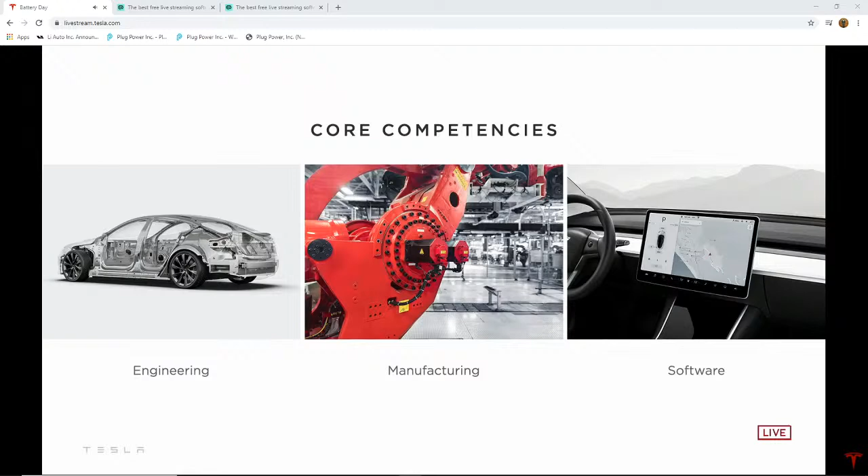Tesla core competencies: we've got engineering, obviously, but also manufacturing. I think manufacturing is underappreciated in general. And the difficulty of designing the machine that makes the machine is vastly harder than the machine itself. So making a Model 3 or Model Y or Cybertruck prototype is really quite trivial compared to designing the factory that makes it. Especially if it's new technology and you want to use new manufacturing methods, it's at least 10 to 100 times harder to do the factory than the prototype.

And that's why you see a lot of companies out there, or startups, they'll bring out a prototype, but they just can't get it over the hump for manufacturing, because manufacturing of new technology especially is the hardest thing by far. Basically the prototype is at best 10% of the difficulty and probably closer to 1%.

And then software. Tesla is both a hardware and a software company. So a huge percentage of our engineers are actually software engineers, and you can think of our car as kind of like a laptop on wheels. So software is incredibly important, not just in the car, but also in the factory, so the factory software is extremely important. And then software in general. These are the three critical areas that are needed to make for an awesome company.

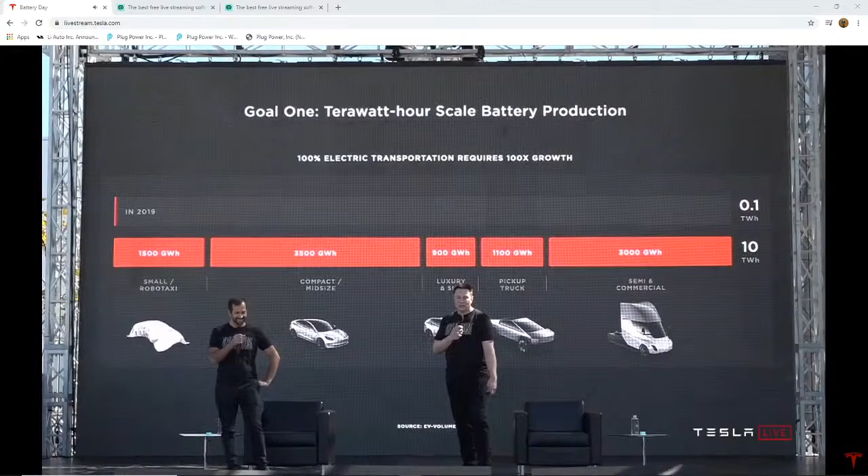Yeah, so. And then on the grid side, we have a similar mountain to climb, 1,600 times growth from today's grid batteries to go 100% renewable on the grid and to take all of the existing heating fossil fuel uses in homes and businesses 100% electric. Yeah, and this number, I think, might grow even more as the world economy matures and as countries with high populations industrialize. But let's say it's roughly 20 to 25 terawatt hours per year, sustained for 15 to 25 years, to transition the world to renewable. This is a lot. Yeah.

So today's batteries cannot scale fast enough. They're just too small. For Giga Nevada, 150 gigawatt hours per year is probably what we expect to make out of there. But this is really pretty small in the grand scheme of things. That's only 0.15 terawatt hours.

And it costs too much. So we would need 135 fully built out Nevada gigafactories to achieve 20 terawatt hours a year. It's not scalable enough of a solution. We need a dramatic rethink of the cell manufacturing system to scale as fast as we can and should.

Yeah, and I think we should view this as more than just a question of money. Money is sort of like an ethereal thing, but it's really the amount of effort. You have a certain amount of effort, in terms of people and machines, and depending on how efficient that effort is, for a given amount of effort, you want the most amount of batteries.

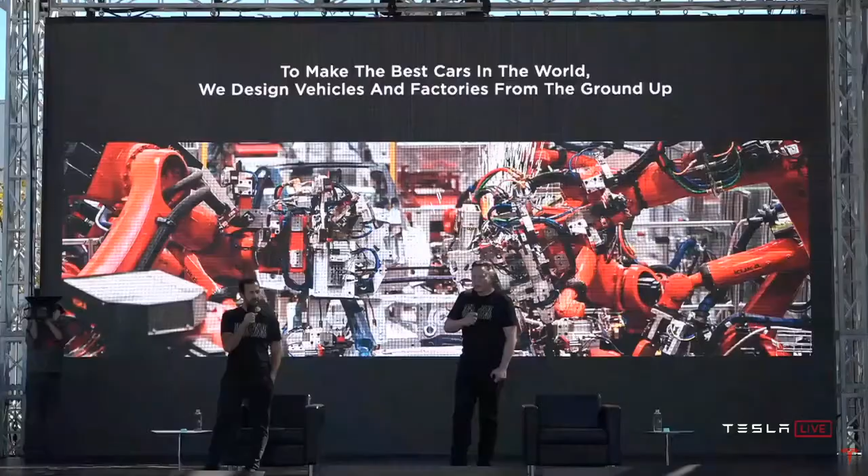And EV market share is growing, but EVs still aren't accessible to all. And you can see, as Drew was saying, it's starting to flatten out a little bit because the rate of improvement of the affordability of cars is just not fast enough. So that's why we got Battery Day. To make the best cars in the world, we design vehicles and factories from the ground up. And now we do this for batteries as well.

It's weird, the slides don't show up quite right. What shows up on the screen is not quite what shows up there. Oh, okay. It's different. Yeah, I think it's because that's... No, that one's supposed to be current.

Anyway, so let's get started. We have a plan to halve the cost per kilowatt hour. And it's not a plan that rests on a single innovation, some research project that'll never see the light of day. It's a plan that has taken creative engineering and industrialization across every facet of what makes a cell into a battery pack, from raw material to the finished thing.

And we're going to go through that plan with you today, step by step, and build up how we get to these goals and how we accelerate this transition and make our vehicles and our grid batteries more affordable. Yeah, we basically thought through almost every element of the battery. There are a few more elements that we won't get to today, but we will get to in the future. So first, before we get too far into it, let's talk about what is in a battery cell.

We've got the cap and the can, negative and positive terminals of the cell. When you open that cell, you've got a tab connected to those terminals, what we call the jelly roll, which is the wound electrodes on the inside. You can actually see what this looks like as you unwind it. This is over 1 meter long in a typical 2170 cell. So it's quite a long winding process. And you can see the tab still there.

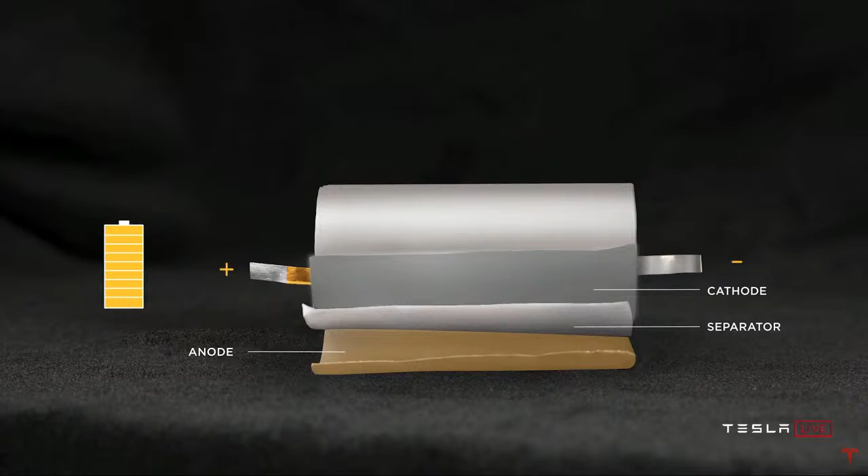To explain what's actually going on here, we've identified anode, cathode, separator, positive and negative terminal. Watch what happens as we discharge the cell: lithium moving from anode to cathode, and then the reverse. When we charge the cell, lithium moving from cathode to anode across the separator. This is the basic of what makes all lithium-ion batteries, no matter what the form factor is.

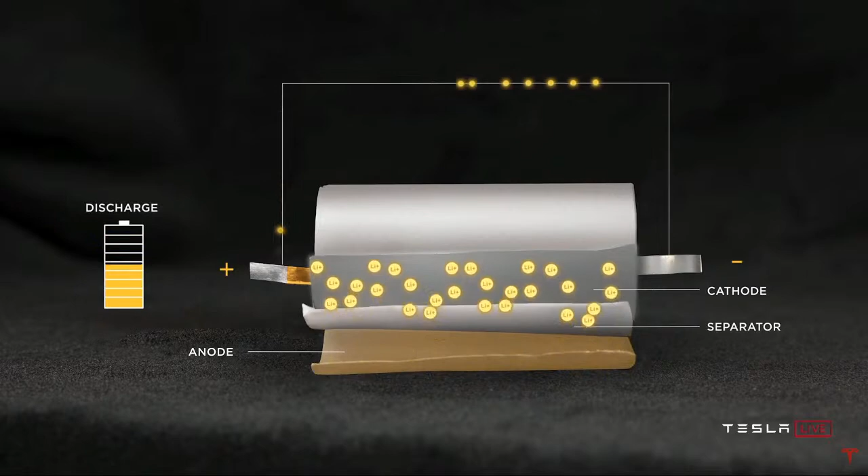And when we look at what's happened to date, at least in our products, we've moved from the 18650 form factor to the 2170 form factor through great collaboration with our partners, Panasonic, new partners like LG and CATL, and probably others in the future.

Yeah. Actually, a slight note on why one is called the 18650 versus the 2170: the first two digits refer to the diameter, and the second two digits refer to the length. So that helps explain what's up with these weird numbers. But nobody could explain to me why there was an extra zero. So I said, okay, we're deleting the zero that nobody can explain in future form factors. So that's why it's technically the 18650, bizarrely, but going forward it's the 2170 because we just got rid of the extra zero because it's pointless.

And this was an evolutionary step, going from 1865 to 2170, bringing 50% more energy into the cell. But when we look to the ideal cell design, if we were to do it ourselves, we need to go beyond what's in front of us and study the full spectrum of options. So as you can see, we swept the key figures of merit, how much we can reduce the cost, and how much vehicle range increases as we change the outer diameter of the cell. We found a sweet spot somewhere around 46 millimeters.

Yeah, and I want to stress, this is not just a concept or a rendering. We're starting to ramp up manufacturing of these cells at our pilot 10 gigawatt hour production facility just around the corner. Yeah. So, yeah. It's a video of some of what's going on in the plant.

Now, to be clear, it will take about a year to reach the 10 gigawatt hour capacity. So this is important to appreciate. Like when you build a factory, there's a certain capacity that you design to, and then it takes some period of time to actually achieve that capacity. So I would say it's probably about a year before we get to the 10 gigawatt hour annualized rate with the pilot plant. And this is just a pilot plant. The actual production plants will be more on the order of maybe 200 gigawatt hours, maybe more over time. And thank you.

But let's stack up everything we just saw at the cell level. So just the cell form factor change enables a 14% dollar per kilowatt hour reduction, just that cell form factor change. And now that you've been teased on this factory, we're going to go on and walk step by step through that factory and discuss a series of innovations there.

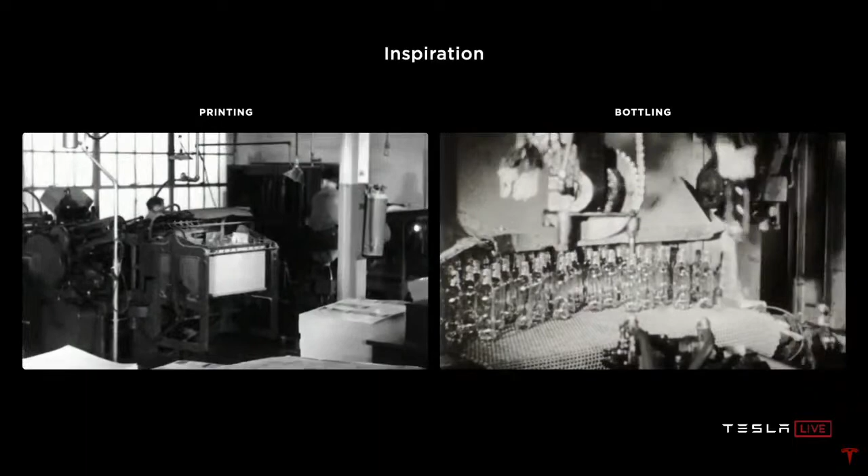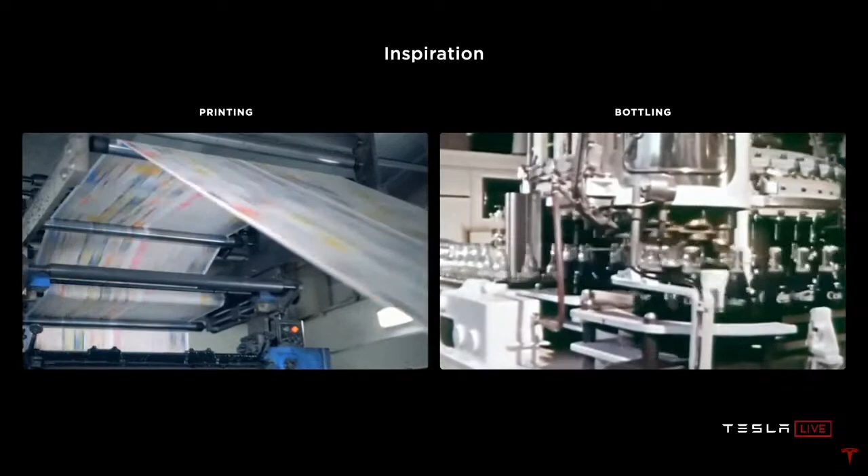When thinking about the ideal cell factory, we have inspirations behind us in the printing and bottling industry, where from humble beginnings, over a century of innovation has enabled mass scale, continuous motion, unbelievably low manufacturing cost. And when we think about the lithium-ion industry, which is really only in its 3rd decade of high-volume production, it has so far to go to achieve similar scale and simplicity. And that was the inspiration that we set out to the team as we thought about how to marry cell design and manufacturing in the best possible factory.

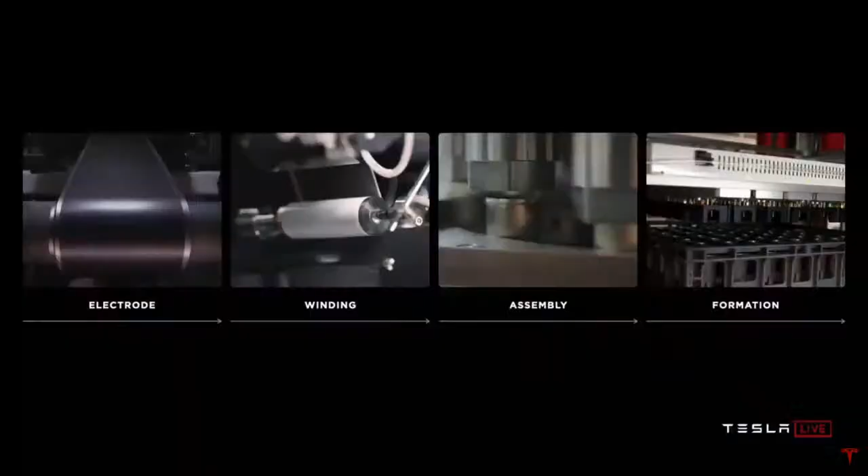And let's talk a little bit about what's in a cell factory. First, there's an electrode process where the active materials are coated into films onto foils. Then those coated foils are wound in the winding process we just talked about, where if you do have tabs, you have to start and stop a lot. Then the jelly roll is assembled into the can, sealed, filled with electrolyte, and then sent to formation, where the cell is charged for the first time, and where the electrochemistry is set and the quality of the cell is verified. And we set out at every step of this process to try to take that inspiration we just showed and think about how we make those processes fundamentally better and more scalable.

And one of the most important processes is where it all begins, the wet process of the electrode coating. And just to give you all a sense of scale, I'm going to walk through what's in that wet process. You've got mixing, where the powders are mixed with either a water or solvents for the cathode. That mix then goes into a large coat and dry oven, where the slurry is coated onto the foil, huge ovens, tens of meters long, dried, and that solvent then has to be recovered. You can see the solvent recovery system. And then finally, the coated foil is compressed to the final density.

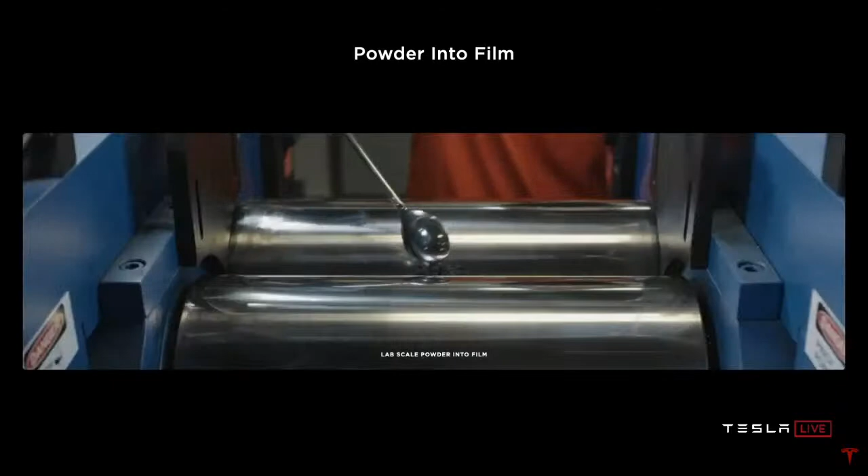And that's what the dry process really is about. And in the most basic form, you can see it here on a bench top. Literally, powder into film. As simple as that. I mean, it's hard, actually, just to be clear. If this was easy, everyone would do it. So it's not like dry coating electrode is actually easy. It's actually very hard to do what appears to be a simple thing.

And it's worth noting, we did acquire Maxwell a little over a year ago, I guess. And it's certainly a good company, but the dry coating they had was sort of, I would call, proof of concept. Since the acquisition, we've actually revved the machine that does dry coating 4 times. So we're in revision 4 post-acquisition of the machine, and there's still a lot of work to do. So I would not say this is completely in the bag.

It's still a lot of work to do, and as you go from benchtop to lab to pilot to volume production, there are actually major issues that you encounter at every level. It's not like you make something work on your bench and bingo, now you can make a bazillion of it. Absolutely. It's insanely difficult to scale up. But if you do scale it up, what you saw before becomes this. So you can see the motivation. A 10 times reduction in footprint, a 10 times reduction in energy, and a massive reduction in investment.

But as Elon was saying, simple is hard. Yeah, I mean, to be clear, I would like to not say that right now it's just totally working. It's close to working, even now, at the pilot plant level. Well, it's fair to say it does work, but with not a high yield. Yeah, so we're still ironing out the kinks, but we made tens of thousands of cells, thousands of kilometers of electrode. We are on the 4th generation of the equipment, so we've learned a lot along the way.

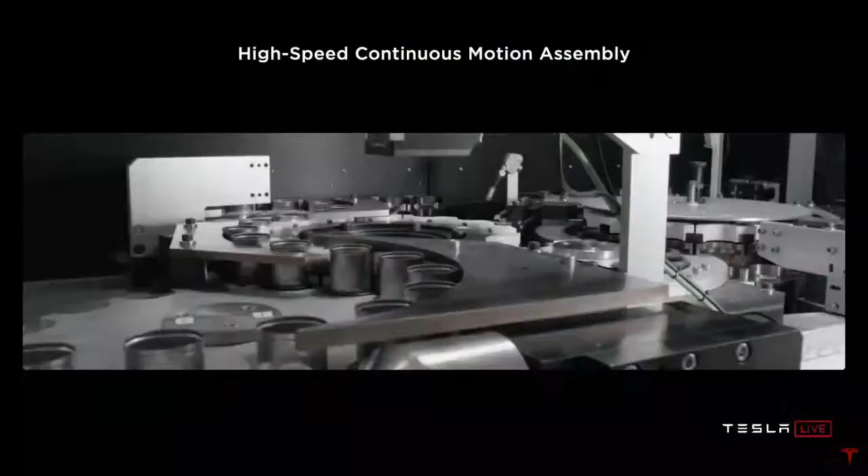The key to a high-performing assembly line is accomplishing processes while in motion, continuous motion, and thinking of the line as a highway, max velocity down the highway, no start and stop, no city driving. Exactly, no stoplights or anything. You want the highway. And together with our internal design team that designs this equipment, we coupled thinking about how to make the best cell with thinking about how to make the best equipment so that we could accomplish the fastest parts per minute rates on all of these tools.

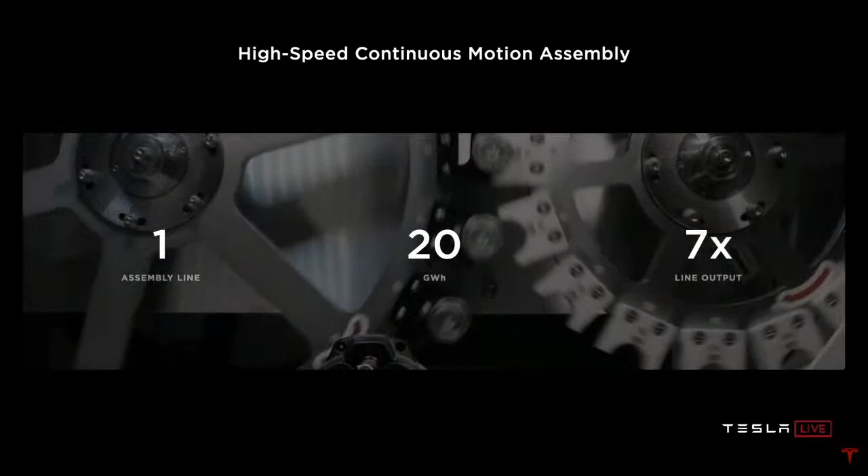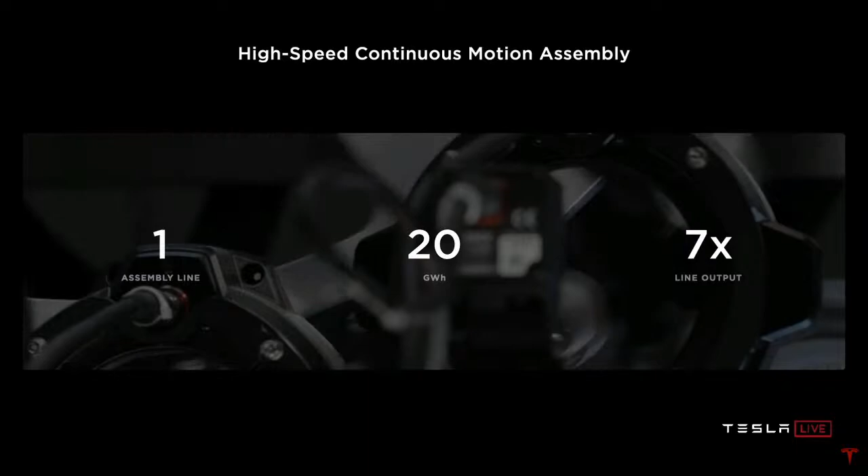And through all of that development, we were able to get to the point where we can implement assembly lines, 1 line, 20 gigawatt hours, 7 times increase in output per line. And when you're thinking about scalability and pure effort, having 1 line be 7x the capability is just effort multiplying.

You can sort of think about the fundamental physics of a factory. I think it's actually quite a lot like the rocket equation, where you've got your exhaust velocity and then the log of the start to end masses. So it's basically saying, how fast are things going and what percentage of the factory volume is doing useful work. And conveyance does not count as useful work. So only the value-added steps.

If you break the factory down into cubic meter sections, or smaller, like 1 liter sections, and say, is a majority of this volume doing useful work? You would be astounded at how bad most factories are. They're maybe 2 or 3%, including our factory in Fremont. So I think it is possible to get to at least 10 times that volumetric efficiency, so more like 30% ish, maybe more, and be 10x better, which means the factory can be 10 times smaller. And then the other thing is how fast are things going through the factory? It's like speed and density.

The faster you go, like if a factory that's moving at say twice the speed of another factory is equivalent to two factories basically, and the company that will be successful is the company that with one factory can accomplish what other companies take 2 or 3 or 4 factories to do. So this is what we're trying to do here is say, okay, how do we with one factory achieve what maybe 5 or even 10 factories would normally be required to achieve?

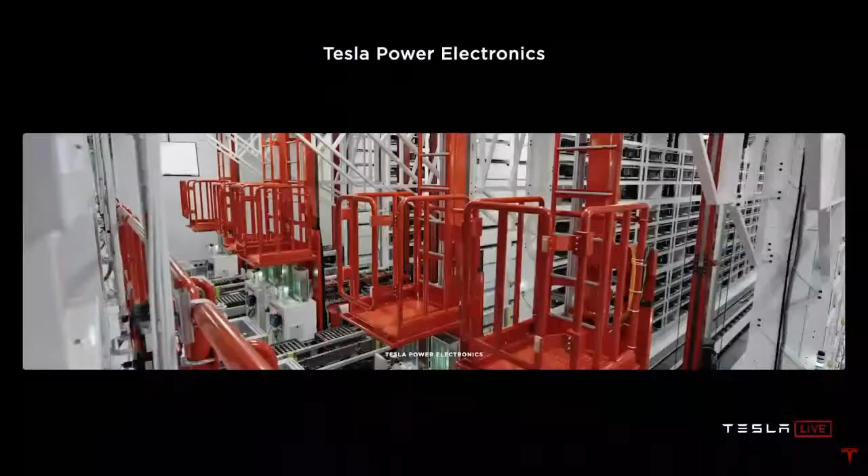Okay, now let's talk about formation. In a typical cell factory, formation represents 25% of the investment. And what is formation? It's charging and discharging cells and verifying the quality of the cell. Turns out we've charged and discharged billions and billions of cells in our vehicles, so we know a thing or two about that. The typical formation setup is you charge and discharge each cell individually.

In our car, we charge thousands of cells at once. And we took our principle and our power electronics, leveraging Powerwall, vehicle battery management systems, and others, to dramatically improve the formation equipment cost effectiveness and density. 86% reduction in formation investment, 75% reduction in footprint.

You want to take this one? Sure. So essentially, what this translates to, based on what we know today, is about a 75% reduction in the investment per kilowatt hour or gigawatt hour. It's just basically 4 times better than the current state of the art to the best of our knowledge. And I think there's probably room to improve even beyond that. Definitely, yeah.

We're able to, from a volume standpoint, in a smaller form factor than Giga Nevada, get many times the cell output. So you can see, basically, we can get a terawatt hour in less space than it took to make 150 gigawatt hours. So this is pretty profound.

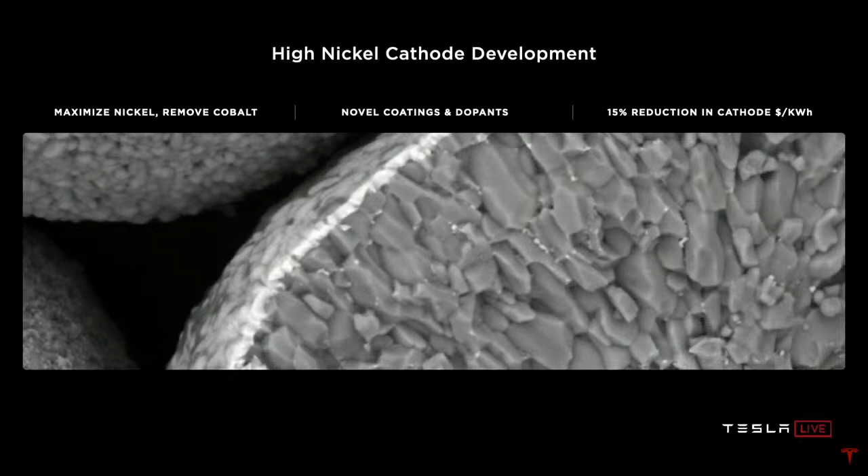But it's not just about nickel. You want to? Yeah, sure.

So in order to scale, we really need to make sure that we're not constrained by total nickel availability. I actually spoke with the CEOs of the biggest mining companies in the world and said, please make more nickel. It's very important. And so I think they are going to make more nickel.

But there's also, I think we need to have a kind of a 3-tiered approach to batteries. So starting with iron, that's kind of like a medium range, and then nickel manganese as sort of a medium plus, intermediate, and then a high nickel for long range applications like Cybertruck and the Semi. Something like a semi truck, it's extremely important to have high energy density in order to get long range.

So, just to give iron a bit more time, although if you look at the watt-hours per kilogram at the cathode level of iron, it looks like nickel's twice as good. But when you fully consider it at the pack level, everything else taken into account, nickel is about maybe 50 or 60% better than iron.

So iron is a little better than it would seem when you look at it at the pack level fully considered. It's not as good as nickel. Nickel is like 50 to 60% better, but it's actually pretty good. And so, good for stationary storage and for medium range applications where energy density is not paramount.

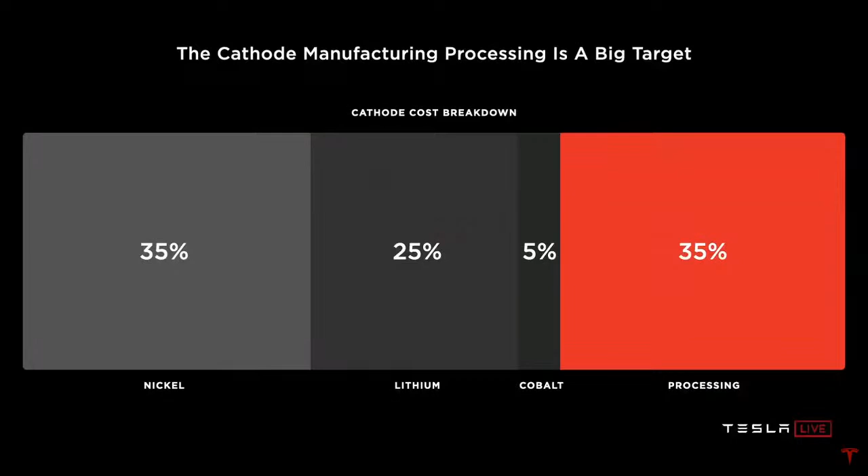Yeah. And, beyond the metals, because a lot of people spend time talking about the metals, actually the cathode process itself is a big target. 35% of the cathode dollar per kilowatt hour is just in transferring it into its final form. And so we see that as a big target, and we decided to take that on. Here's a view of the traditional cathode process.

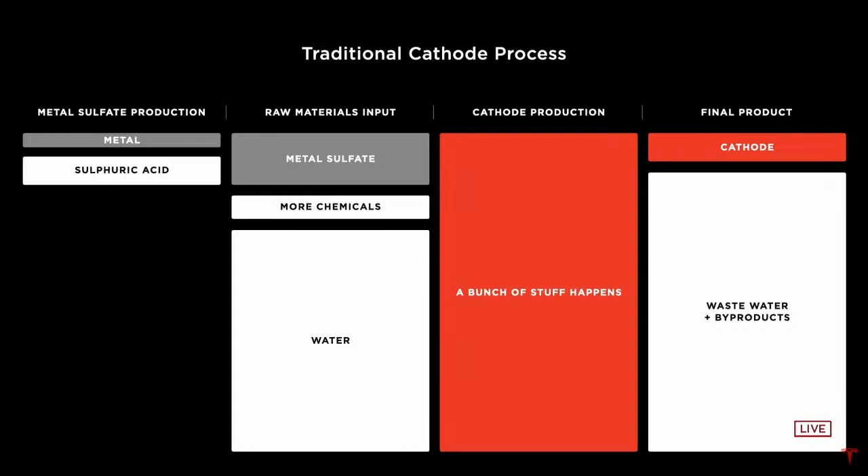Effectively, if you start at the left and you have the metal from the mine, the first thing that happens is the metal from the mine is changed into an intermediate thing called a metal sulfate, because that just happened to be what chemists wanted a long time ago. And then when you're making the cathode, you have to take this metal sulfate, add chemicals, add a whole bunch of water, a whole bunch of stuff happens in the middle, and at the end, you get that little bit of cathode and a whole bunch of wastewater and byproducts.

Yeah, it's insanely complicated. If you look at the total, it's a small world journey of I am a nickel atom. What happens to me? And it's crazy. Like you're going around the world 3 times. There's like the moral equivalent of digging the ditch, filling the ditch, and digging the ditch again. It's total madness, basically. And these things just grew up as legacy things, like how it was done before.

And then they connected the dots, but really didn't think of the whole thing from a first principles standpoint, saying how do we get from the nickel ore in the ground to the finished nickel product for a battery. And so we've looked at the entire value chain and said, how can we make this as simple as possible? And that's what we're proposing here with our process. As you can see, a whole lot less is going on here. We get rid of the intermediate: metal, water, final product cathode, recirculate the water, no wastewater at all.

And when you summarize all of that, it's a 66% reduction in CapEx investment, a 76% reduction in process cost, and zero wastewater. Much more scalable solution. Yeah.

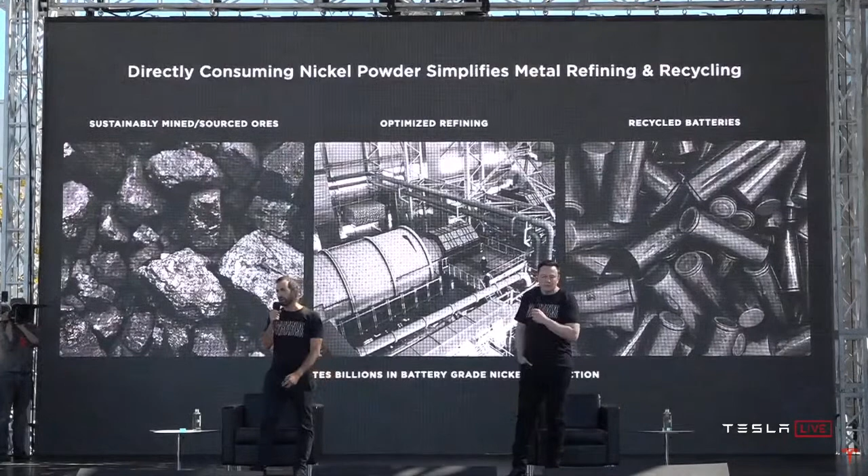And then when you think about the fact that now we're actually just directly consuming the raw metal nickel powder, it dramatically simplifies the metal refining part of the whole process. So we can eliminate billions in battery-grade nickel intermediate production. It's not needed at all. We can also use that same process we showed on the previous page to directly consume the metal powder coming out of recycled electric vehicle and grid storage batteries. So this process enables both simpler mining and simpler recycling.

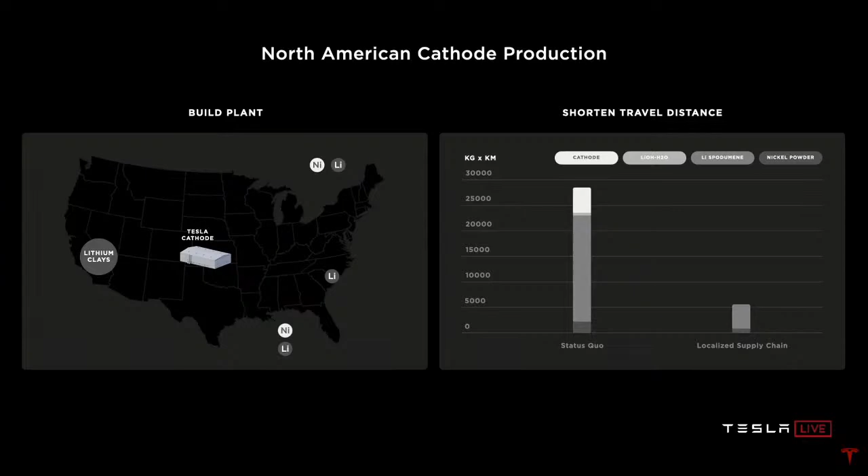And now that we have this process, obviously we're going to go and start building our own cathode facility in North America and leveraging all of the North American resources that exist for nickel and lithium. And just localizing our cathode supply chain and production, we can reduce miles traveled by all the materials that end up in the cathode by 80%, which is huge for cost. To be clear, cathode production would be part of the Tesla cell production plant. So it would basically be raw materials coming from the mine, and out comes a battery.

And on that note, the way the lithium ends up in the cell is through the cathode, so then we should obviously do on-site lithium conversion as well, which is what we will do using a new process that we're going to pioneer. That's a sulfate-free process again, skip the intermediate. 33% reduction in lithium cost, 100% electric facility co-located with the cathode plant.

So it's important to note that there is a massive amount of lithium on Earth. Lithium is not like oil. There's a massive amount of it pretty much everywhere. In fact, there's enough lithium in the United States to convert the entire United States fleet to electric. All the cars in the United States, there's like 300 million or something like that. Every vehicle in the United States can be converted to electric using only lithium that is available in the United States, discovered today, what we already know exists. People really haven't even been looking, because it's just widely available.

But it is important to say, what is the smartest way to take the ore and extract the lithium and do so in an environmentally friendly way? And we actually discovered, again looking at it from a first principles physics standpoint instead of just the way it's always been done, that we can actually use table salt, sodium chloride, to basically extract the lithium from the ore. Nobody's done this before, to the best of my knowledge, and all the elements are reusable.

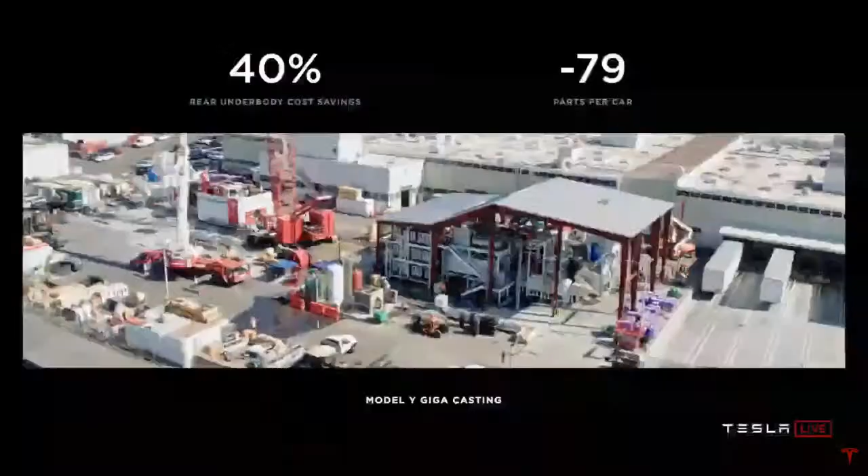So there's an architecture that we've been wanting to do at Tesla for a long time, and we finally figured it out. And I think it's the way that all electric cars in the future will ultimately be made. It's the right way to do things. So it starts with having a single-piece casting for the front body and the rear body. And in order to do this, we commissioned the largest casting machine that has ever been made. And it's currently working just over the road at our Fremont plant. It's pretty sweet.

Currently making the entire rear section of the car as a single piece, high-pressure die-cast aluminum. And in order to do this, we actually had to develop our own alloy because we wanted a high-strength casting alloy that did not require coatings or heat treatment. This is a big deal for castings, especially with a large casting. If you heat treat it afterwards, it tends to deform. It kind of does this potato chip thing. So it's very hard to keep a large casting to have its shape.

So in order to achieve this, there was no alloy that existed that could do this. So we developed our own alloy, a special alloy of aluminum that has high strength without heat treat and is very castable. So that's a great achievement of our materials team. In fact, in general, we've got a lot of advanced materials coming for Tesla, new alloys and materials that have never existed before. So you're basically making the front and rear of the car as a single piece, and then that

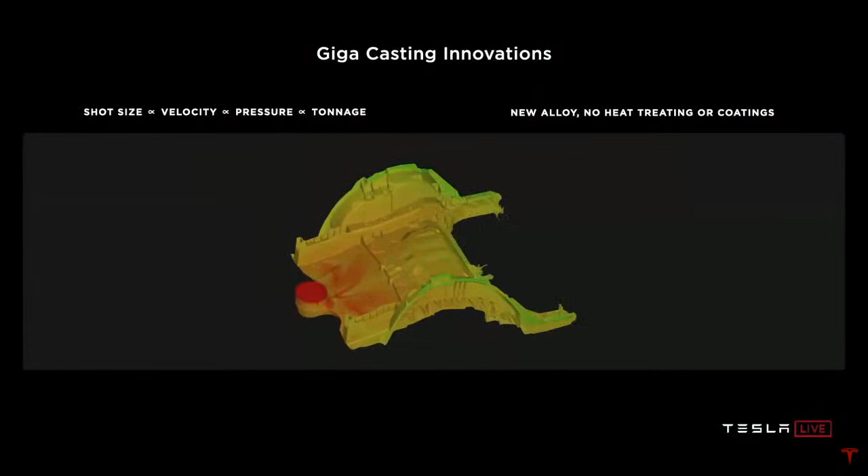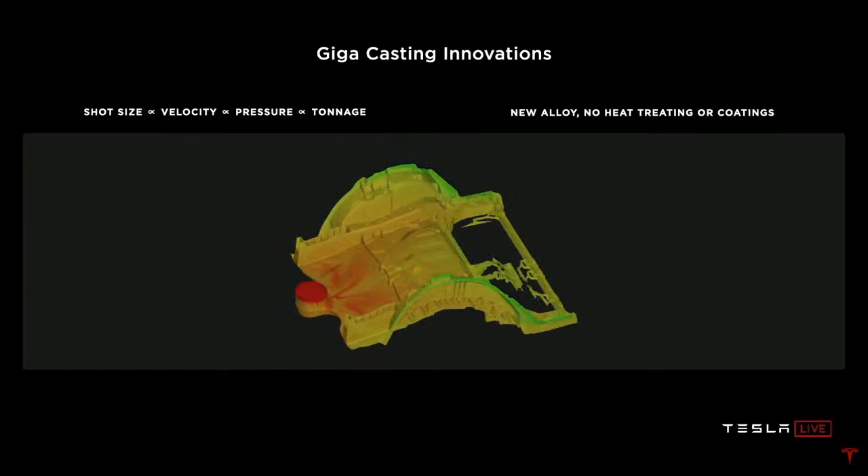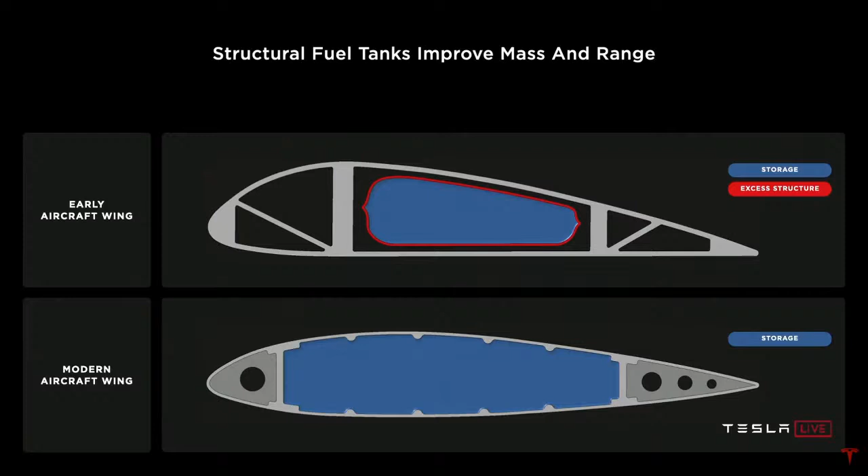interfaces to what we call the structural battery, where the battery for the first time will have dual use. The battery will both have the use as an energy device and as structure. This is absolutely the way things are done. In the early days of aircraft, they would carry the fuel tanks as cargo. So the fuel tanks actually were quite difficult to carry. They were basically worse than cargo. You had to kind of bolt them down.

It was very difficult. And then somebody said, "Hey, what if we just make the wing tanks? What if we just make the fuel tank in wing shape?" So in all modern airplanes, your wing is just a fuel tank in wing shape. This is absolutely the way to do it. And then the fuel tank serves as dual structure, and it's no longer cargo. It's fundamental to the structure of the aircraft. This was a major breakthrough. We're doing the same for cars. So this is really quite profound.

Effectively, the non-cell portion of the battery has negative mass. We save more mass in the rest of the vehicle than the non-cell portion of the battery. So it's like, well, how do you really minimize the mass of a battery? Make it negative. Make the non-cell portion of the battery pack negative.

It also allows us to pack the cells more densely because we do not have intermediate structure in the battery pack. So instead of having these supports and stabilizers and stringers and structural elements in the battery, we now have a lot more space in the battery because the pack itself is structural. What we do is essentially,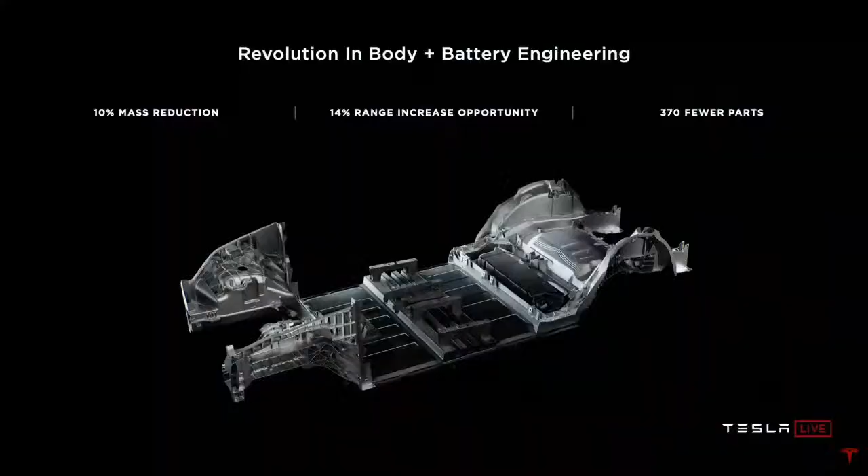It also improves what's called the polar moment of inertia, which you can think of like when there's an ice skater, arms out or arms in. Arms in, you rotate faster. So if you can bring things closer to the center, you reduce the polar moment of inertia, and that means the car maneuvers better. It just feels better. You won't know why, but it just feels more agile. So it's really cool. This is really major. Like I said, 10% mass reduction in the body of the car, 14% range increase, 370 fewer parts.

So, I really think that long term, any cars that do not take this architecture will not be competitive. And it's not just at the product level a better product, but in the factory, it's a massive simplification. You saw the part removal. It's casting machines. It's the structural battery pack. So we're looking at over 50% reduction in investment per gigawatt hour, 35% reduction in floor space, and we'll continue to improve that as we make the vehicle factory of the future. Yeah, so it's major improvements on all fronts, from the cell all the way to the vehicle.

And in addition to the improvements we just said on enabling additional range and improving the structural performance of the vehicle, it is worth another 7% dollar per kilowatt hour reduction at the battery pack level, bringing our total reductions now to 56% dollars per kilowatt hour. Yeah.

All right, so stacking it up, we're not just talking about cost or range. We've got to look at all the facets. So range increase, we're unlocking up to 54% increase in range for our vehicles and energy density for our energy products. 56% reduction in dollars per kilowatt hour at the battery pack level, and a 69% reduction in investment per gigawatt hour, which is the true enabler when we talk back about how do we achieve this scale problem here.